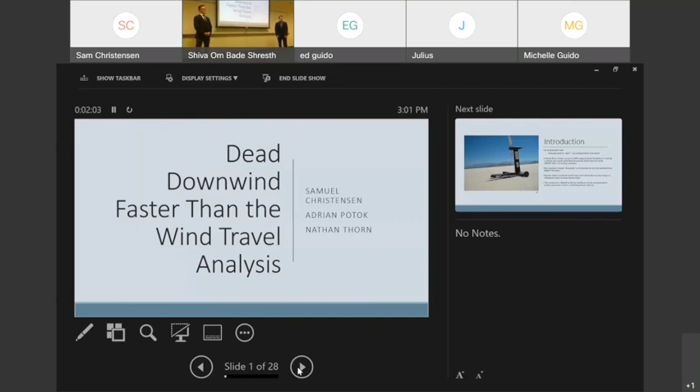All right, so for a little introduction, we'll talk about wind-powered vehicles. Sailboats, in order to travel quickly against the wind, need to tack, which is sailing at an angle to the wind. So usually, if you're using a sailboat and going straight downwind, you can't go fast. Andrew Bauer wrote a paper talking about possibilities of being able to build a vehicle that could go straight downwind, but actually travel faster than the wind. This was in 1969.

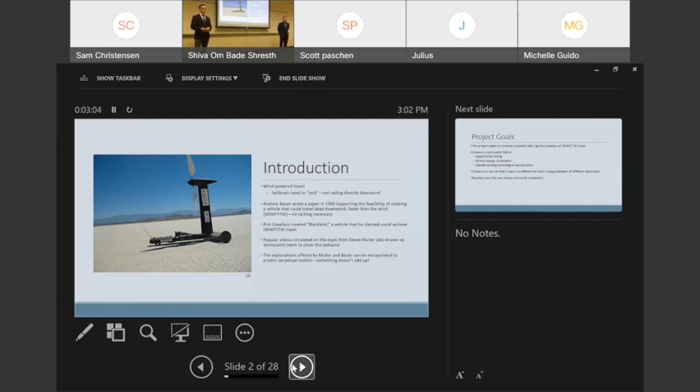But more recently, Rick Cavallaro created a vehicle called Blackbird, which he claimed could travel dead downwind faster than the wind. Popular videos circulated by Derek Muller, you might know him by his channel name Veritasium, seem to show this behavior. But the explanations offered by Muller don't necessarily hold up with conservation of energy, so something doesn't add up.

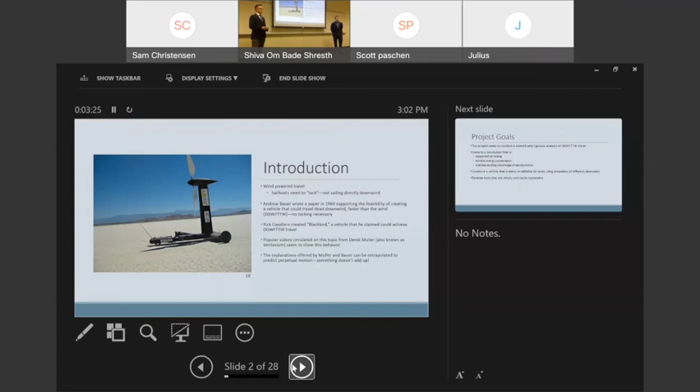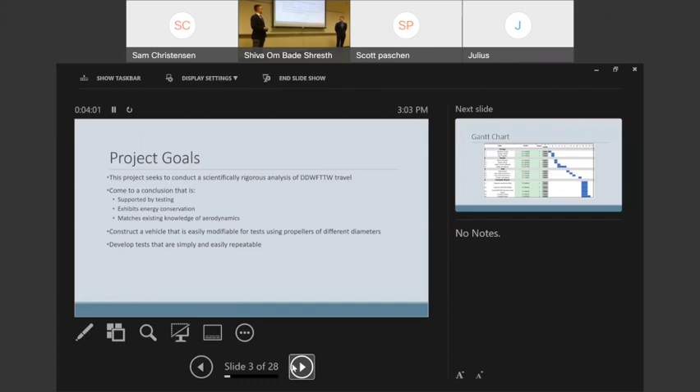All right, so the goals of our project: we are seeking to explain this in a scientifically rigorous manner. We want to come to a conclusion that is supported by test data, exhibits energy conservation, and is in line with our existing knowledge of aerodynamics. So we wanted to construct a vehicle that was easily modifiable and could be used in tests with propellers of different diameters. And we want to develop tests that are simple and easily repeatable. So here's our Gantt chart, a timeline of what we wanted to do with this project.

So the project scope: we built a vehicle with 3 possible different configurations. The main thing we changed between them was the propeller size, and we tested 3 wind speeds on each propeller. A limitation was the airspeed measurement in the advanced design wind tunnel. We pulled from a chart and a digital manometer, and we correlated airspeed to that. We were only able to get an accuracy of about plus or minus 1/2 of a meter per second.

Also, we made some assumptions in the videogrammetry that we used. We assumed that the vehicle moved parallel to the camera and that it rolled without slipping. These are close to being true, but variation could have introduced some uncertainty into our data. We also assumed that the track surface irregularities were small enough that they didn't cause any significant error. Our final limitation of this project was the wind tunnel track that we made. We would have liked it to be a little longer so that we could have seen some more steady state behavior out of it.

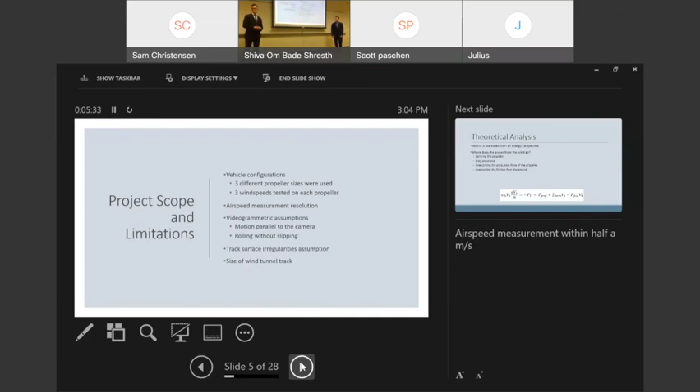So how do we do the theoretical analysis? It's important to know that there are a couple different configurations that you can set a dead downwind faster than the wind vehicle up in. One configuration consists of setting it up so that the turbine is geared to the wheels in such a way that when the cart is moving slower than the wind speed, the cart is pushed forward by the turbine. The other configuration is swapping the gears around, so that when it's slower than the wind speed, it's actually being pushed backwards by the propeller. That's how we divide the configurations.

So you might say, why would you ever set up the propeller so that it's pushing back on the vehicle? The thing is that when you get to wind speed, the relative direction of the wind velocity on the propeller actually reverses, because, according to the explanation, you're now moving faster than the wind. So the direction of the wind is actually reversed, and the propeller would then be pushing the vehicle forward. So we tested the propeller configuration, and the idea is we want to know if the propeller configuration can go faster than the wind from rest. So all of our tests start from rest, and then we drop them in.

So how do we do the theoretical analysis for the propeller configuration? We looked at it from an energy point of view. The energy that's going into the system is the wind. We don't have any motors or anything like that in the car. We just set the car down into the wind tunnel, and then the wind just pushes the car. So where does the power go from there?

Well, one spot that it goes is the drag on the vehicle. That's the only thing actually propelling our car, because it's the propeller configuration, so the propeller is actually going to push backwards on the vehicle. Another spot that power goes is the propeller. Something has to spin the propeller, and anything that rotates is going to have inertia. And it takes some energy to rotate that propeller.

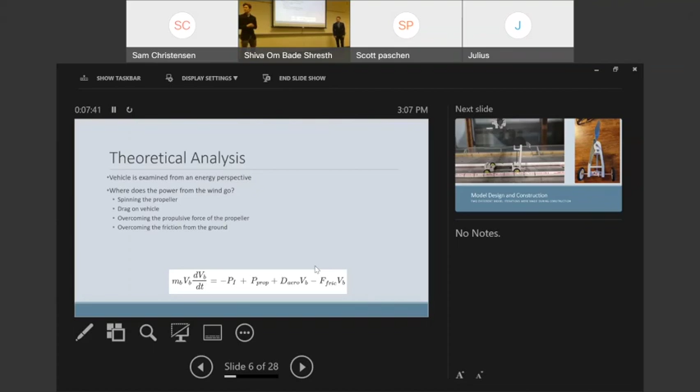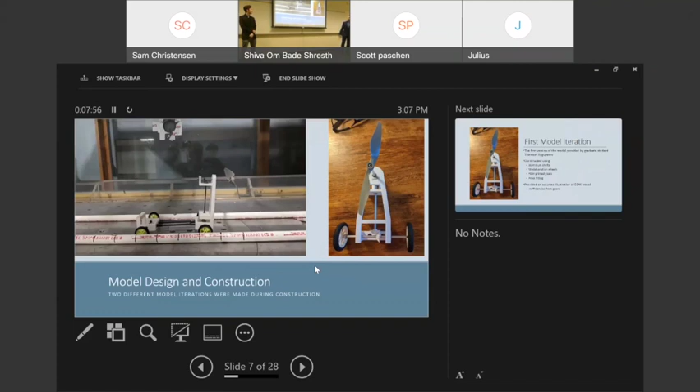But now with that in mind, we're going to be looking a little bit at our model design and the construction for the model. So through this project, we ended up having two different iterations pictured here, the first one on the right and the second one on the left. So we're going to get into those a little bit more in the next slide.

So the first model iteration, graduate student Tanesh made this model, and the frame was 3D printed with FDM printing, and it was constructed using aluminum shafts, model aviation wheels, FDM printed gears, and a lot of glue or press fitting to put it together with bearings.

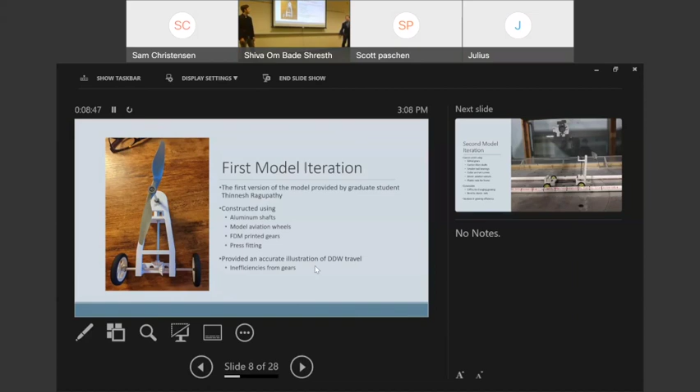So although this did provide an accurate illustration of dead downwind travel with this model, because the gears were 3D printed, there were a lot of inefficiencies with the gears interfacing with each other, since obviously they were plastic, they didn't interface very well. So that's why we decided to make our second iteration of the model, pictured here.

So as you can see, a very similar model. The frame was 3D printed, but we are using metal gears. In this, we have carbon fiber shafts, and because of that, we had to use smaller ball bearings. Additionally, we had a collar with set screws, model aviation wheels, and some plastic rods for the frame.

So because we used the set screws with the collar to attach the propeller to the model, that allowed us to easily change the configuration of the model by swapping out different size propellers onto it, so we could test how the different size propellers affected the motion in the wind tunnel.

So the downside to this was it's very difficult to change how the gearing works with this model because of how it's constructed. The bearings and the gears are glued in place. Because of that, we would have liked to do more testing with changing how the gearing is done, but it's very difficult with how this is made.

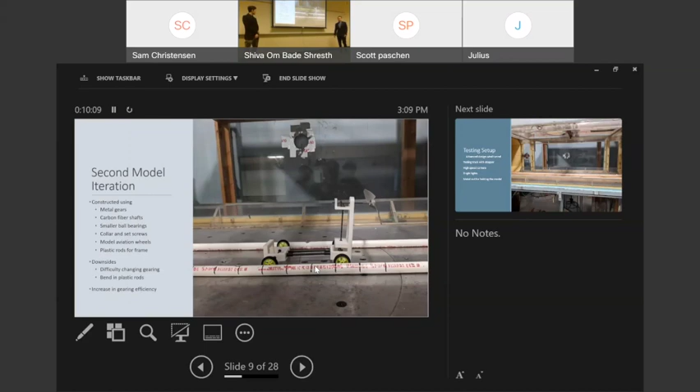Additionally, as you can see, the model bends slightly forward on the front. That doesn't exactly affect the testing, but it is something that would be nice to be fixed. But overall, we did increase the gearing efficiency a lot by using metal gears, which is what we set out to do with the second iteration.

So now for the testing setup. We used the Advanced Design Wind Tunnel in the Applied Aerodynamics lab at the Kalamazoo Airport. And so what we did is in this wind tunnel, we set up a track.

As you can see in the wind tunnel, the bottom of the track is wood, and we have some railings as well as a stopper on the back of the track, so our model doesn't get pushed back into the wind tunnel. And for the setup, we used a high-speed camera with bright lights and a metal rod for holding the model, which we'll see in a later slide in a second.

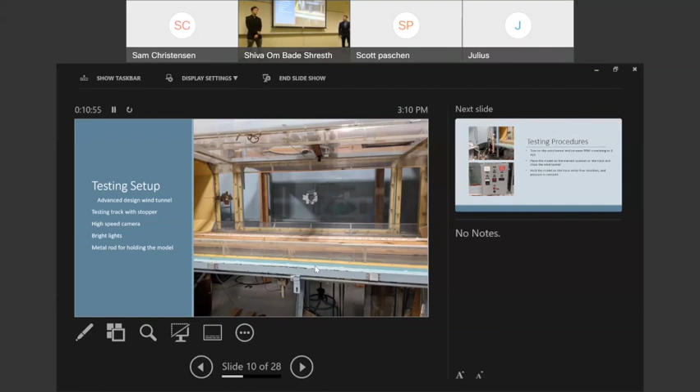On this slide here, we can see some of the testing procedures. So this is sort of a quick version of the testing procedures. We would turn on the wind tunnel, increase the RPM using the wind tunnel control panel there in the bottom left, correlating to 8 meters per second.

This is where we had sort of an issue with the resolution, because in order to see the speed, we had to use a chart to get the pressure from the wind tunnel and correlate that to a meters per second speed. As you can see, that's the top left image. You can see the gauge there that reads the pressure.

And what we would do is place the model on the track onto the marked location and hold the model using this metal rod, which we'll see in a second. We close the wind tunnel, allow the flow to stabilize, and let the pressure become constant, and then release the model to do our testing.

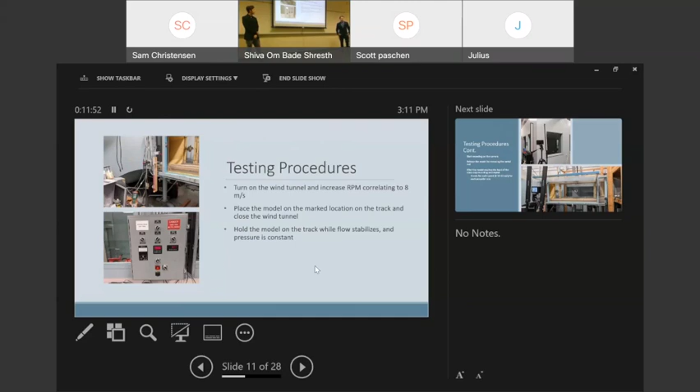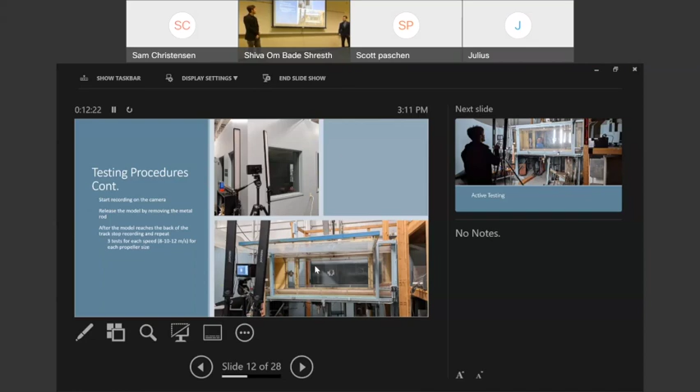Slide here, we'll see, and we'd set it up, and then when we were ready, we'd start recording, release the model by removing the metal rod, and then when it reaches the back of the wind tunnel, it would be out of frame of the camera, and we would stop, and then do 3 tests for different speeds, 8, 10, and 12 meters per second, for each propeller.

Then you can see here, this is when we were doing testing. We have those lights set up directly next to the camera because we used retroreflective tape on the side of the model, so that we could use the frames from the camera in a program to detect the light being reflected back at the camera in order to track the motion of the model. And you can see Nate there holding the model still while the velocity is coming up to speed.

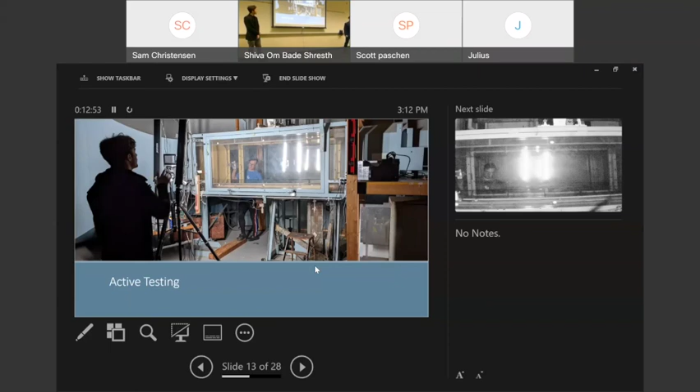Yeah, so now we'd like to show you exactly what this looks like. Obviously, the video looks very interesting, and that's because we recorded everything in grayscale. So when we play it back, it's very difficult to see things. So we upped the contrast a lot, so you can actually see what's going on in the video. But we just want to show you some videos to show you exactly the breadth of the speeds that we did testing over.

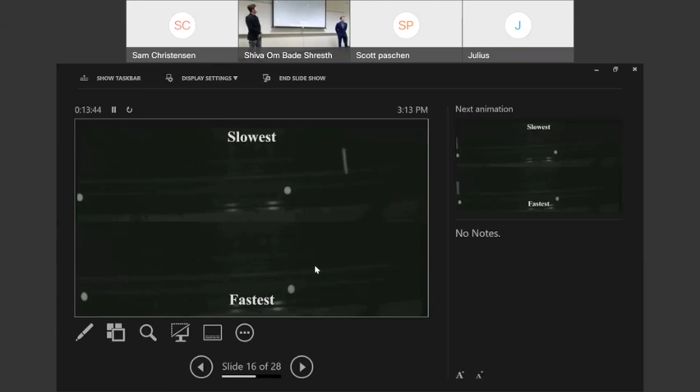So exactly how do we do all of our data processing once we had all of our videos and all the images? Everything was written in Python, and we used a library called OpenCV to do all the image processing. Basically, what that entailed was we just looked frame to frame at where the retroreflective tracker that we placed on the cart was in the image, so we can pretty easily get a pixel location of where exactly the center of the tracker is.

So then when we had all that information, we could measure the plane of motion that the cart is moving in. The camera obviously wasn't moving, we just set it in one spot. So we assumed the cart is moving completely parallel in one plane of motion. We just measured the entire width of the area that the cart is moving relative to the image. So we basically got a tape measure and held it all the way across the image frame where the cart was moving. And then we had a distance for how far the cart moves from one side of the screen to the other side of the screen.

And then from that, we can get a scale to figure out how many meters is 1 pixel or vice versa. And then we looked at, again, the position of the tracker in each frame, and from that, we had the position in actual meters. From that information, we get the velocity and the acceleration or whatever else we wanted.

But that's not enough. We want to know how much faster the cart is going at a certain set of conditions. So to do that, we have to normalize these conditions. For instance, normalizing the vehicle velocity by the wind velocity. If we increase the wind velocity by 1 meter per second, I'm pretty sure everybody could come to the conclusion that the cart is obviously going to move faster. But how much faster is it moving? Is it moving faster by the same increment? Is it moving 1 meter per second faster? So for that we just divide by wind velocity.

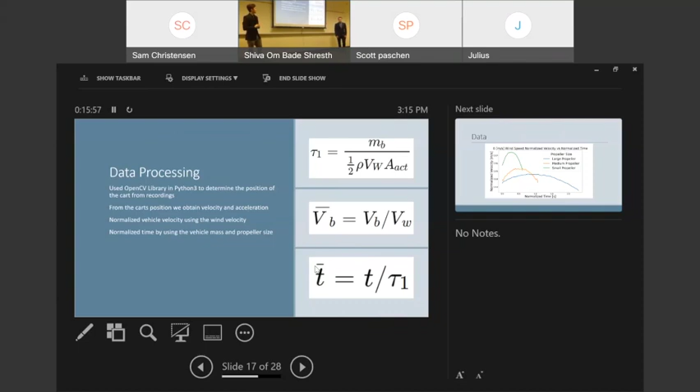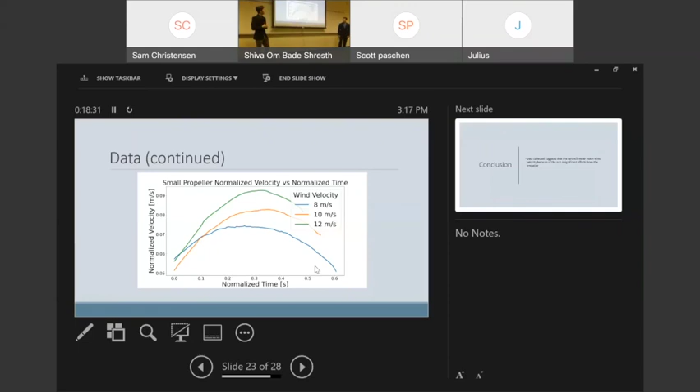Another thing is you might wonder, well, if we have all this information, at the beginning of this we talked about how people will show carts going faster than the wind. For instance, the Veritasium video of a cart on the salt flats going faster than the wind. How is that possible, right? It's likely that because of the uncontrolled conditions of the salt flats, he can't control exactly what direction the wind is impinging on the propeller, right? So you can't say if you're actually going dead downwind faster than the wind because you don't know what direction the wind is actually coming from. And like we talked about with sailing, if the wind is coming in from an angle, you can in fact go faster than the wind, but not directly dead downwind, right?

Another thing is wind gusts. There's no way of actually controlling to have you at a constant speed. So if you have some massive wind gust, and then suddenly the wind dies down, it's going to seem like you're going faster than the wind because the wind speed just dramatically decreased.

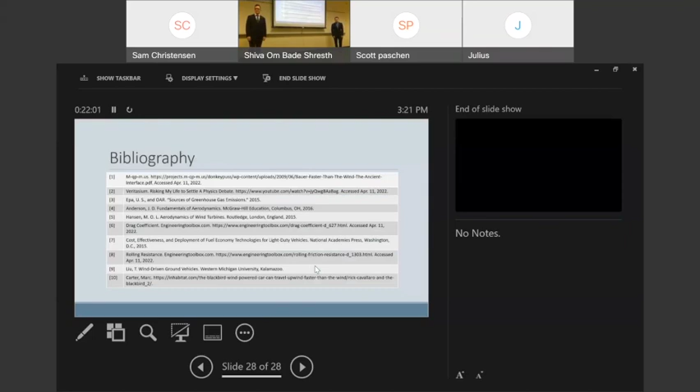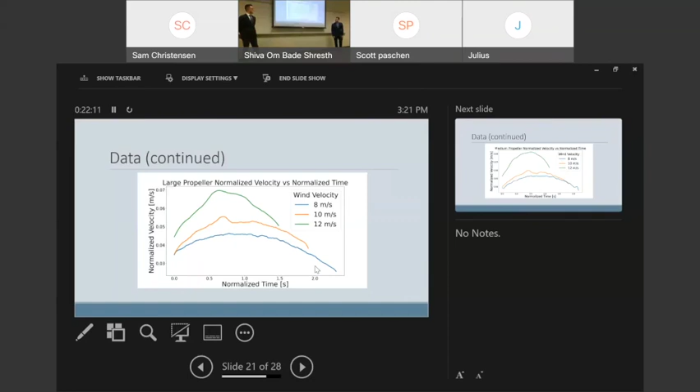I'm having a little difficulty. Somebody asking me, I'm an engineer, I will predict the opposite. You know what I mean? Small, lower velocity. So could you explain that?

Yeah, so that's because this is the propeller configuration. The strength of the propeller is dictated by the size of the actuator disc, right? So if you have a larger propeller, you're going to have a larger actuator disc area, so it makes sense that a larger propeller would be more powerful. But because it's in the propeller configuration, when it's moving slower than the wind, the propeller is actually resisting the motion of the car. It's moving air in the opposite direction that you would think it does, right?

And the reason that it's set up like that is because once it's going faster than the wind, the relative direction of the wind velocity actually reverses, because you're going faster than the wind. So in that regime you would have a propulsive force actually pushing the car forward. But if you set up your car like that and you start from rest, you're never going to get to wind speed, because the larger the propeller you have, the further it's going to push you back. So you're never going to actually get a chance to go faster.

Question? Actually, there were two theories, because originally this vehicle is explained as not extracting wind energy to drive the vehicle. In the opposite, they think this is a propeller driving. But what is the power driving the propeller? That's a question. The people on YouTube originally explained that the wind pushes the vehicle a little bit, so it moves a little bit, right?

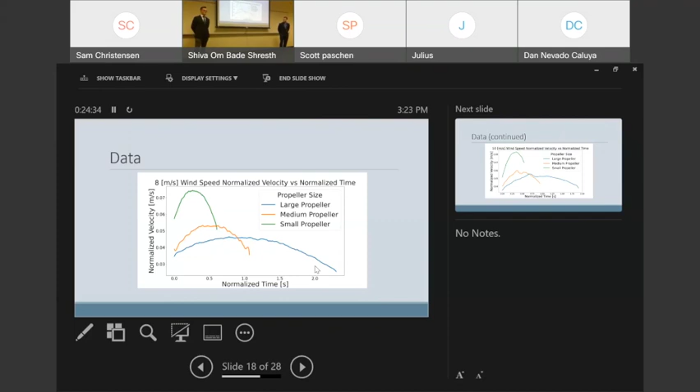So the wheel is connected to the propeller, so the propeller's driving power comes from the wheel. But the wheel's power comes from the wind, drag pushing. So right now this group's design is trying to check that explanation. You have some theory? Yeah, we predicted roughly correct based on those equations here. We model all those equations.

But I think our model is a little bit too simple. I think their experimental data is correct. It will go up, down. But our model prediction so far just increases and asymptotically approaches, but it doesn't go down. So we need to refine the model. But at least these experiments show the vehicle cannot reach the wind speed, right? Much slower than that.

Also, a larger propeller is not good. The reason is the propeller itself is acting as an energy sink, it sucks the energy. So the larger it is, the more energy it absorbs, therefore your vehicle goes slowly. So basically this experiment proved that.

And another design is not a propeller, it's a wind turbine, so the gearbox will be set differently. That means this wind turbine extracts wind energy to drive the vehicle. I think this is a natural way to do it. I think your question was probably puzzling at the beginning because you're thinking more about the wind turbine. That's another vehicle, so later we want to test it. The equation of motion is very similar.